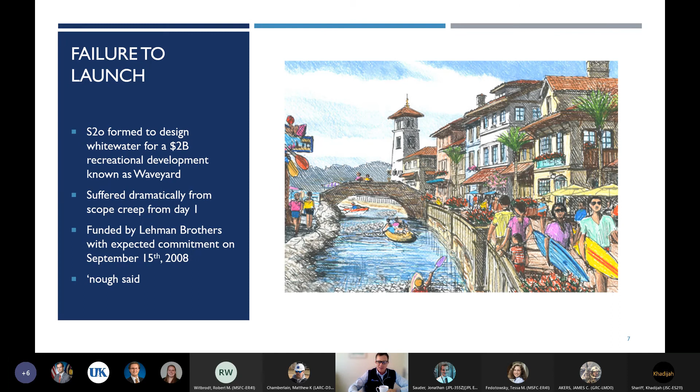And in fact, Lehman Brothers was the backer of most financing at the level that we needed, and Lehman Brothers went out of business. And so not only did we lose our ability to fund this project, but it didn't look like we would be able to fund future projects for some period of time until that was resolved. So that was crushing, right? I just started a company and failed right away.

Well, right around then, the phone rang, and London 2012 had a designer that they didn't like, and they'd lost confidence in. They'd done some testing of the design and didn't like it, didn't think it would work. And so they asked us to team up with a local British firm, and they said, look, we want you guys to redesign this, use as much of it as you can, because it's already under construction. So this is the project. The first day I saw it, pump stations going in.

So a lot of the variables that we could have controlled for, we couldn't control for. They had been set. The grading was largely done. The earthwork was largely done. And so this had a big red circle around it down at the ODA. And they were essentially saying, we don't know if we can deliver this project on time for the Olympics.

And so here we were, a project in crisis, and we were given a project in crisis as our opportunity to survive. I say we, it was I, as a one-person company at that point in time. And I think when you look at career paths and things like that, I don't think opportunity often presents a project that's well-funded, well-formulated, on schedule, and ready to go. And so I suspect that a lot of companies come from places like this, right? If you want to make a bang, you got to roll up your sleeves a little bit.

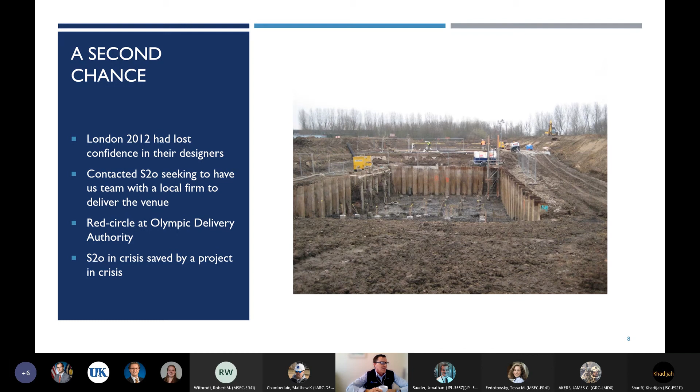And so we were literally making designs for this project for that day, getting them drawings for that day, and at the same time trying to build this physical model that we had to create, and then trying to build a computer model so that we didn't have to hand draft or essentially draft each page separately.

The physical model was, I think, when you start talking about, hey, how do you bootstrap together an engineering design? We were hired with this, and the requirement was that we build a physical model in 9 weeks and operate it for the Olympic Delivery Authority and the British Canoe Union, who's their national federation. Normally you hire a lab, normally it takes 2 to 3 months to get all that done, another 2 to 3 months to build it. And so we basically went and rented a large warehouse here in Boulder.

And then how do you build a model that quickly, that accurately? And so we came up with the idea, or I guess I came up with the idea of rapid prototyping. And so I did all of the drawings in Revit at a 1-to-1. And then we basically put those drawings on a grid on the ground with a laser, and then laid them out on the grid that they were labeled as.

And so that contractor, as he ran around and cut the boards that made up the base, which is actually fairly complicated to be accurate, he's looking at a piece of paper on the ground that says, I need a board here that's 3 foot 7 inches long and has a 36-degree angle on this side and a 95-degree angle on that side, and it's all colored in. So he cuts that board and he puts it on top of the colored in board on the ground, and it either fits or it doesn't. And so they built this thing in about 2.5 weeks, which would normally take a long time.

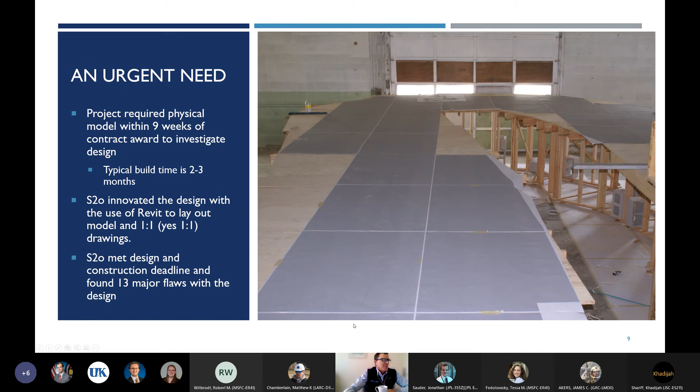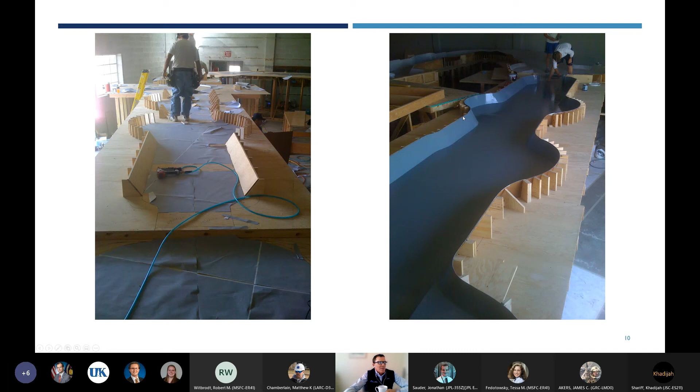We then repapered to the same grid and laid out the model on top of it. And so you can see here, they're actually building the channel, this physical model, to the paper again and cutting it out along and laying channel. It had all the information they needed to build it right there. And so these guys that had never seen a whitewater channel before, if you look right here, created a highly accurate, within 1/8 of an inch, channel model that was polished and ready for prime time by the time the ODA came in.

You can see that it's a big thing. It was a 10,000 square foot model. It cost about $150,000 to build. There's a lot of infrastructure that goes with it. I learned a lot of lessons here.

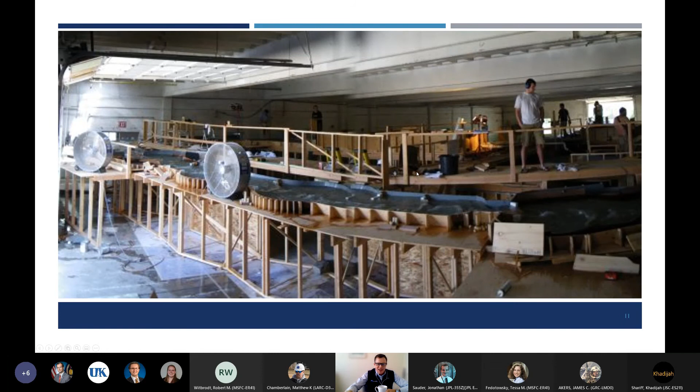We're familiar with using gas pumps for the construction that we do. So we used gas pumps, and the first day that we laid it out, everybody got horrible headaches, and I had to call people in the middle of the night to make sure they're still breathing. And so we had to rent about 20 of these fans. Luckily, the warehouse had a door on each side, and so we opened the doors and ran the fans full time. Next model we made, we put electric pumps in.

You can see those pumps here right in the middle of the warehouse. We had to build a large pond that would contain all the water when we turned it off, and that was deep enough that we didn't suck air from the surface for our pumps.

And then a measuring system for that water on top. So we calibrated the water. We basically pumped more water than we need, then used a valve to leak the extra water, and measured it. This is my forced partner from Great Britain, who's one of my closer friends now in the world, and he and I got along great.

At the end, we said, look, we had 2 different ways to measure the water and weren't sure if they were accurate. So we made a box that was a cubic meter and timed how long it took to fill up, which would give us the cubic meters per second pretty accurately. In the end, we stripped down to our underwear, jumped in, ran 6 measurements, did an average, and figured out whether we had the right flow rate. Turned out that we did.

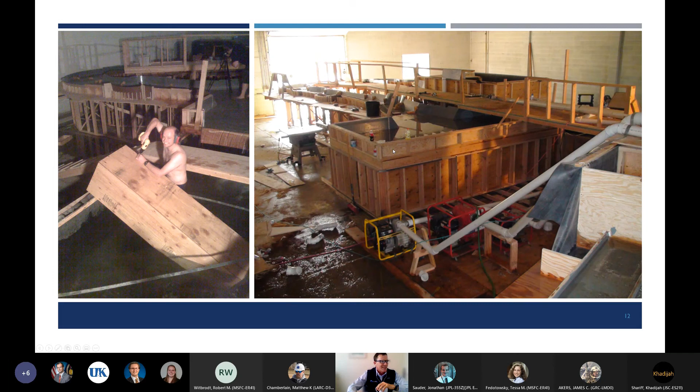And we actually still use that method to check all of our models to this day. When we're done, it was highly effective.

The British had, instead of firing the team they didn't believe in, promoted them. So they were obviously evaluating us and keen to say their design was perfect. It wasn't. But by having the physical model, even with that contentiousness in the room, it was easy to say, hey guys, let's all agree that this doesn't work.

These are the British coaches here, and this is a Canadian team that came in to do research on our model. These guys are from the Olympic Delivery Authority. We were able to go back and forth to the chalkboard and come to consensus on the 13 major changes we had to make, and very quickly reach consensus on whether we had solved those issues or not.

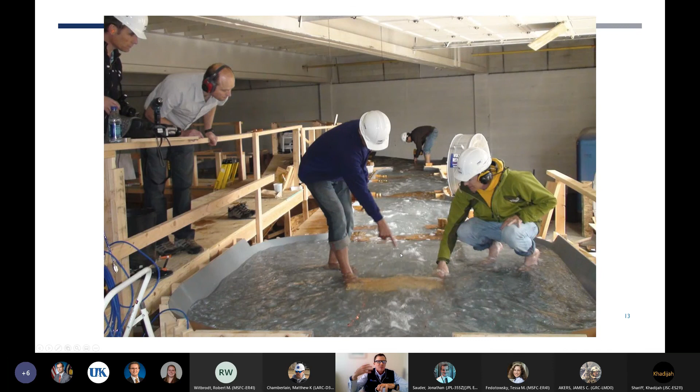Eventually we did solve those issues and came up with a design that we liked. At the same time, this guy Andy and I had been drinking a beer as we built this thing, and started talking about a better mousetrap. We both liked the idea of creating a new obstacle system. The previous system was problematic for a lot of reasons. Could we build this thing and do it in a better way?

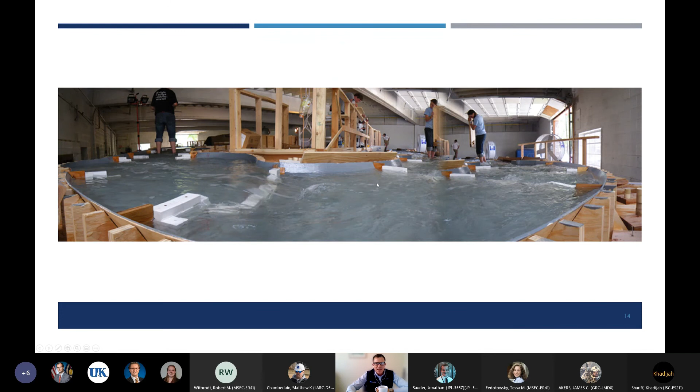In some ways that comes from one of the objectives on the project, which is to design a channel system that will be state of the art in 10 years. What does that even mean? I think they have liberal arts majors who come up with crazy things and dump it on engineers all the time.

And here we were stuck with this constraint: I had raced in the Olympics 10, 12 years before the 2012 games, and the sport had completely changed. How did we know, in ways we hadn't foreseen, what it would look like in 10 more years? So we started talking about, well, what if you could design a channel that would change with the obstacles?

So this is a traditional channel, the one we built in Charlotte. You can see the rocks and concrete are the primary mode of setting up what that river does. There's this French system that allows you to constrict or not constrict the channel, but it doesn't give you a lot of options for reshaping it. That was state of the art in 2000 and still being used in 2008, 2009 when we were doing this project. We started to say, look, what if we could put something anywhere in that channel?

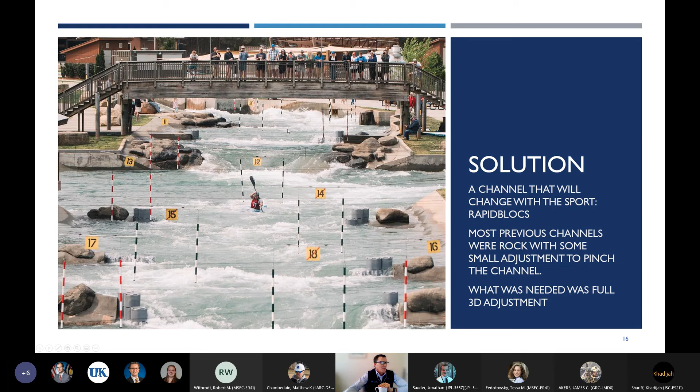This became the nugget of opportunity that came out of that 2012 channel to really change the way whitewater parks were done. I think you've all done that freshman design class where you create an ideation matrix and say, okay, I'm going to solve this problem, here's 6 different ways to do it, and then solve that problem. We did it. I mean, we did everything.

So how did we get from these blocks, which coincidentally are covered in Velcro? That was the first thing we came up with: what if they were just Velcro and we could pick them up and move them around, which sounds stupid, and in fact it is completely stupid, but that's where we started on this thing, and this is where we ended. This is the Olympic Games in London.

You can see our RapidBlocs, a fairly refined system made from polyethylene with parts supplied from all over the world. India and China is part of that. So how did we get there?

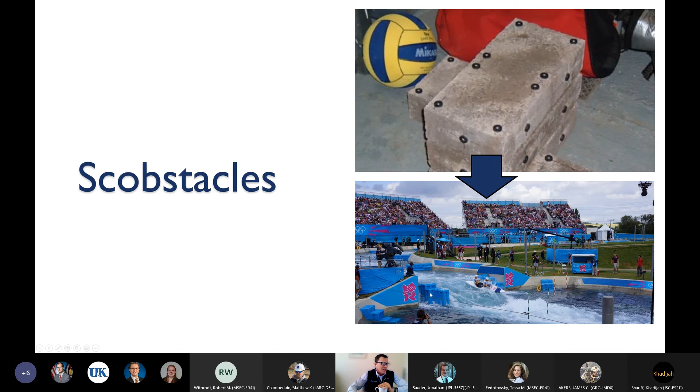So this is the previous system. I'm putting it in Charlotte. You can ignore that ball there.

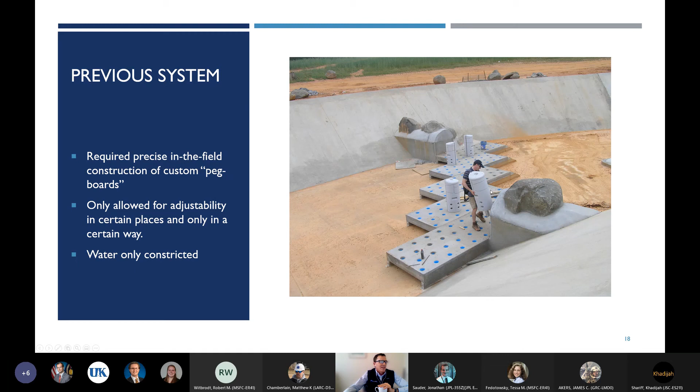We basically said, look, the problem with this is it connects in only a few limited places, and to move or make these pegboards is a big deal. Those pegboards require that every one of those cups or slots that these popsicles slide into be exactly vertical. If they're not exactly vertical, then these two blocks don't fit next to each other, which happens all the time. You're asking a construction crew out on this big dirty site full of tractors to pour these precast pieces and get them into the channel without breaking them, and hopefully they're all ideally aligned and working. In reality, it doesn't work that way, and it doesn't give you a lot of flexibility.

So we started running through these different examples of how we could do it. We started with the Velcro. We went to bicycle, quick connect bicycle hardware. So, okay, we'll put it in, we'll twist it, and that'll tighten things up. Wouldn't that be great? Turns out that hardware costs an arm and a leg, and nobody's interested in paying that.

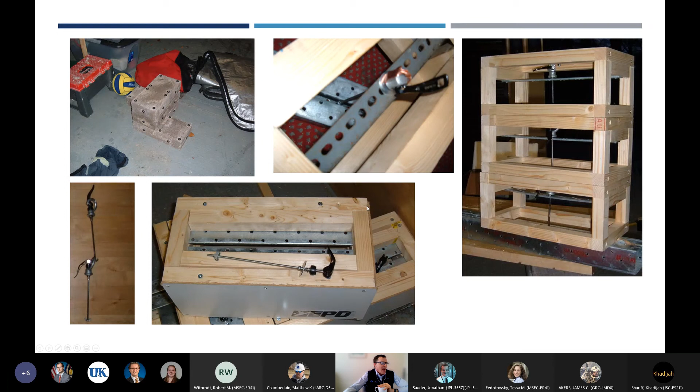We looked at all different ways to attach, and things really started to coalesce. We had a lot more prototypes than this, but things really started to coalesce when we discovered the idea of using Unistrut. Unistrut's a commercially available thing. Most buildings you've been in have the wires in the basement attached through Unistrut. Most job sites have a circuit box that's made up of Unistrut hammered into the ground.

I'm sure if you walk around your building or your development, you'll see it everywhere. It's a common and commercially available product with a million different variations. Some of their variations are made to be poured into concrete, others are made to be put into structures like this. So we were able to take this commercially available system and start to evolve prototypes that would work, and it made a repeatable pattern. At the end of the day, we were able, with some figuring things out, to make them crisscross the same way Legos do.

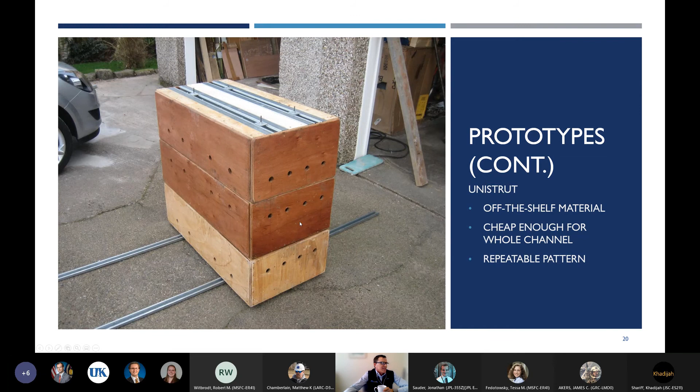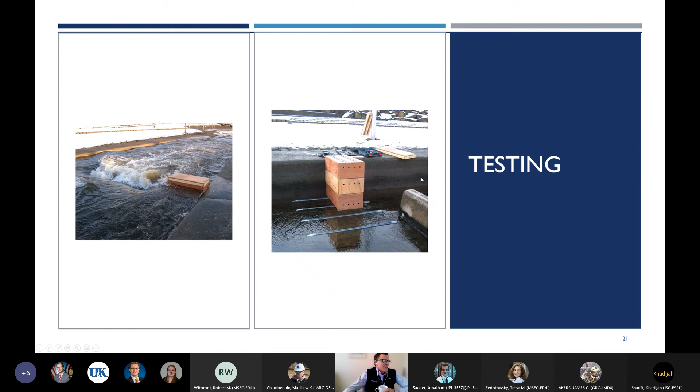So I can put another row in front and rotate layers so that structurally we have this very robust system made from smaller pieces that are connected themselves. We did put it in a river. It did work, and you could tell this wasn't a fun day, a cold day, but at the end of the day we were able to create this eddy, and in fact the operator of that channel loved the blocks and eventually redid that entire channel with RapidBlocs. So in the long run, they became our client. Instead, though, we were asking them favors to help us put this thing together. You can see that the previous version had concrete obstacles.

So that's when it went over to me. For you stresses and strains, structures, and materials guys, I had done a lot of FEA in undergrad and grad school, so I started testing these blocks out. I actually used about 6 or 7 different softwares to do it, and tried a million different shapes. I tried arches, I tried square boxes, I tried smaller obstacles, I tried bigger obstacles, and we ran into some key issues.

The biggest one being that plastic is really bad in tension, and the other big one is plastic is really bad in compression. So how do we solve those two issues? In the end, we created these rods. We basically put this metal, what we call top square, flush with the surface of this block, and that metal component connects by a metal rod to the metal top square and the one below it. Or at the bottom, it connects by that same piece of hardware into the channel itself. We didn't want to have 10 different kinds of hardware to work with.

The compression was the hardest part. They were all failing by buckling when you stack these things up. So like I said, I tried arches, I tried a bunch of different things, beam structures, things like that within the plastic. And what we came up with is this castellated structure. It looks like a castle.

I don't know if castellated is a real word or we made that up, but this castellated structure was quite effective at resisting buckling, even with the use of polyethylene.

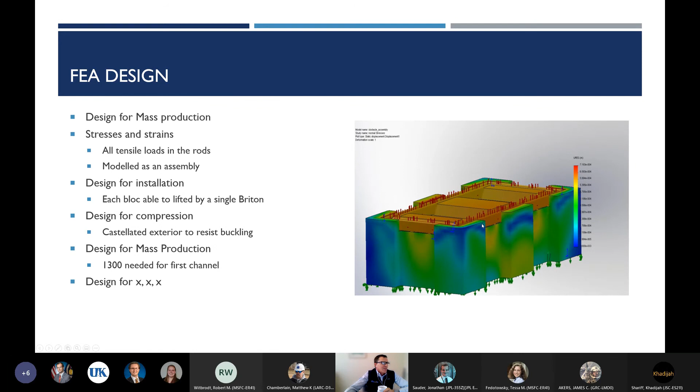We did this design-for-X, which I'm sure you've all done in school and at work, to the nth degree to make sure we had everything we needed as we went into this.

We started making some serious prototypes. We teamed up with a former sponsor of mine, the Dagger Canoe Company, and looked at whether we could make these in China, or somewhere else. What about guys who make garbage cans, could they make these? When we went out into the world to talk to plastic manufacturers, everybody said that's a really hard shape to mold.

They said we should hire kayak manufacturers, they're the best. It turns out kayak guys have a very hard task making a boat that survives and holds its shape in a whitewater environment. At the end of the day, we were in the right place with the right people and had the right relationships, and so we made these prototypes.

You'll see a bunch of different colors in the prototypes. That's because we made them with leftover plastic in the factory, apparently from orange boats people didn't like that year, so we got some orange blocks. Some of that actually factored into our success versus failure on the project.

The benefit of this polyethylene is you can make a ton of them, they're made to be mass produced. Blow molding would have been better, but it's hard to do that shape in blow molding.

We also found this is a rotomold, that's an oven, and this is the rack that goes into the rotomold, spinning around and cooling on the drying rack. When they put that rig together, it's designed to hold sea kayaks, which are very long, around 15-16 foot things, but whitewater kayaks are 9 or 10-foot things.

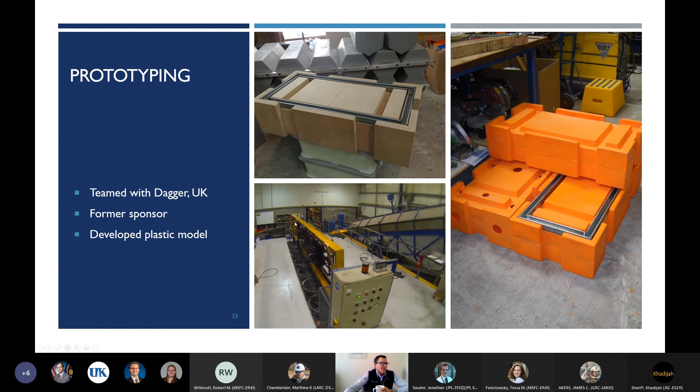So we were able to take our mold for the rapid blocks and bolt it to the mold where there used to be a blank for smaller whitewater kayaks, which is a big part of this company's business. They could mold a block without significant additional manufacturing costs, there's materials costs, but we were able to fit it in the oven when they were doing these other things. They were pretty happy to help us out and develop a new line of work, especially since it just used up extra capacity they already had.

So this is our final product, these are rapid blocks, you can see the dimensions on there. That's the rod that makes the whole thing work. If it weren't for that, we'd have basically just patented the Lego block, right? But this connection going through from this top square into that top square is what holds all of those tensile loads, and this castellated shape is what holds all of those compression loads.

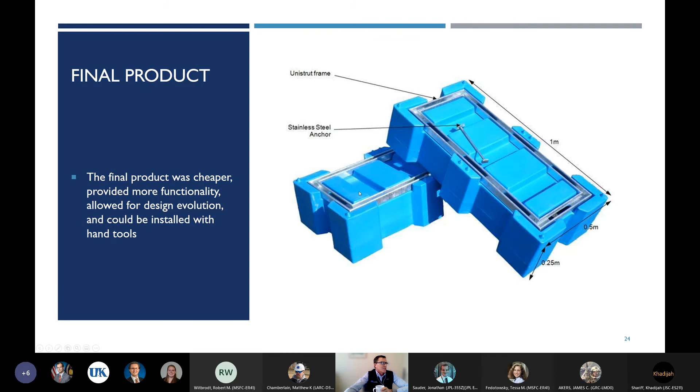This connection works for these blocks as well as our half blocks, and then this other system allows us to connect all kinds of other shapes in there. So it's a very versatile, more versatile than we had actually planned for, system. And we brought this back and said, we want to use this.

Well, remember again, the guys who got fired were our bosses now, and they were pretty keen to not see the channel work, and they were also pretty keen to see us fail. They were also not engineers. They ran an engineering company; one of them was a music major and one of them was a physical education major, and so it was kind of a weird team to be up against.

But they came back and said, you have to get a college professor to endorse this product. And I think we all come from a world where engineers have stamps, and I have a stamp, and I would certainly go to a structural engineer and get a stamp for this. But instead, I had to go back to my old college professor, Dr. Colton, and ask him to do an evaluation of them.

We did our report. This is a secret for all of you. We did our report in Maple version 14, which is a terrible software that, unless you know how to use it, doesn't make sense at all to anybody. I think it's more user-friendly now than it was. But it's kind of my secret in engineering when you get something like this, is you write it all in Maple, and we gave it to these guys that had majored in music and physical education, and they read it and said it looked good. I'm sure they didn't know what it meant.

And so we went off to build these things, and they said, no, you have to pass a structural test. Basically the idea was, you're going to fail. And we said, fine, we'll do the testing. And so we had that structural analysis I'd done in Maple. We built this test bed. This is unistrut that's laid in the concrete, the in situ unistrut. We put a load cell that measured the load on this, and then we basically just pulled on this come-along until that load matched our calculated load for the project.

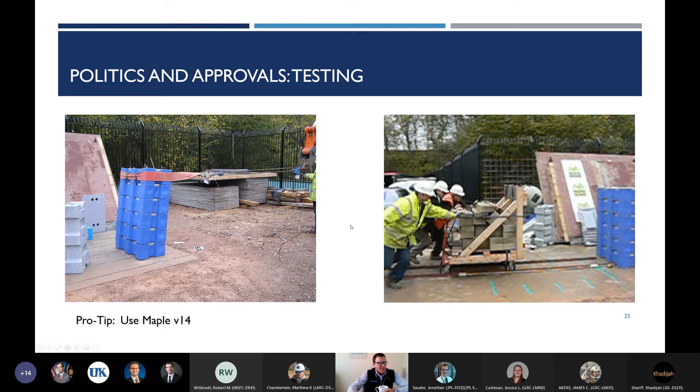Gave ourselves a big pat on the back, and we brought the client, the final owner of the park in London, out to see our test one. My British partner lacks nothing except for style, and he lacks style completely. And so he had built these demo blocks from leftover plastic and then dressed them up essentially as a Coleman cooler. And the lady came out to look at it and said, "You're not putting that in my Olympic channel, no way." And that was almost the end of our company right there, because she had to be coerced that we could do these in any set color. And in the end, we had to let her actually choose the color that these were built in. And so the final product is this.

This is baby blue that matched the colors of the Olympics. You can see the blue around here. We manufactured, I think, a total of about 1,500 for this client, 1,300 in that channel. At one point in time, again, we identified 13 problems. They allowed us to fix 12 because you could fix the 13th with rapid blocks.

When we installed this in the channel, we had made back all of our money. The molds cost about $150,000. We had made back all of our money except for 5,000 pounds. And so we basically worked for 2 years and lost 5,000 pounds is what it came down to.

And then they ran it, and of course that 13th issue that we had brought up turned out to be a real issue. So they bought, I think, 200 or 100 more rapid blocks, and we went from 5,000 pounds in the hole to 5,000 pounds ahead, and went out and had a steak dinner and a big party, and we were now off and running as the rapid blocks obstacle company. So,

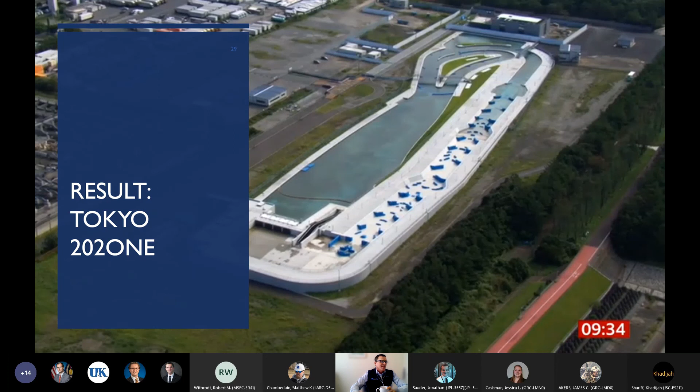So we've started to really evolve into other shapes. There's wedges, there's groin infills, not on this course, there's start gates. So really it's allowed us to change that course. And again, I'm taking a lot of credit here for something that both my British partner and I have been involved in. But I'm a big believer that innovation leads to innovation. So essentially what did we do? We took whitewater, right? And we reinvented the most basic thing in it, the rock that sits in rivers, and made it something that was changeable and adaptable to different systems.

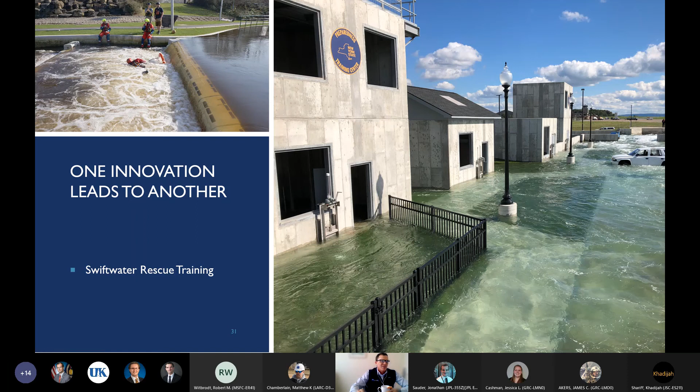And so coming up with those innovative ideas that allow you to get something done in an unconventional way, drawings that are one-to-one. We spent $200 every time we built a new layer of that model just on paper. And so I think those things are very significant. And the other one, I saw a talk, I think I was at Tech when I saw it, from Burt Rutan, who's this guy who does a lot of aerospace innovation. And he talked about trying to work with different teams on innovation and finding out that usually there were too many people in the room.

And I think this idea of sitting down on a construction site during a rest break with a bottle of beer in your hand and saying, hey, what if we do this? What if we do that? And I'll say that I do that all the time because my mind wanders while I'm working on projects. And when I do that, most often people in the room are like, that's crazy. Don't do that. That's nuts. Whoever thought of putting the space shuttle on top of a 747 has an incredible amount of guts to open his mouth in a meeting, right? But at the end of the day, that's how you find these solutions.